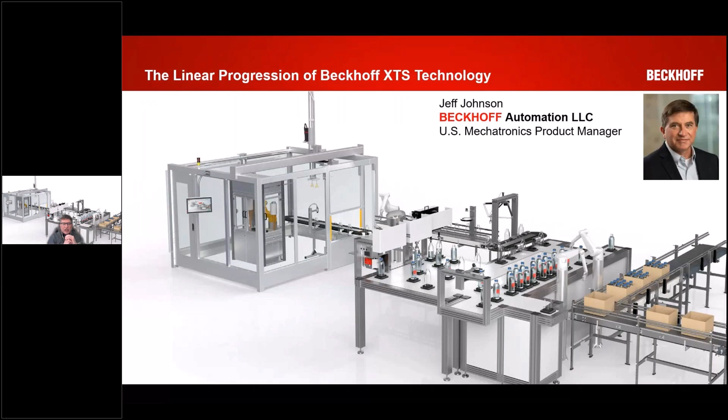The XTS, or Extended Transport System, will give you a lot of benefits and advantages in innovating your machine designs and processes as it has evolved over the years. This timeline shows the progression of the Beckhoff XTS technology. Back in the early 2000s, we developed a concept for a linear transport system working with one of our customers, Bosch Packaging, which is now called Syntegon. And we showed it in 2008 at the SPS show in Germany.

Think of that initial version as more of a concept design. Could this concept work? Is it feasible for the industry? Well, the concept was well received at the show and generated a lot of excitement. So we went back, took everything that we learned from that, and in 2012 we released what is now the production version called XTS. In 2014 we partnered with HEPCO for a more robust rail system. We also released the 45 and 22.5 degree curves.

Then in 2018, we released track management. In 2019, we expanded our magnet set for lighter and heavier payloads and faster machines. 2023 brought about the Hygienic XTS system. Last year, we released No Cable Technology, or NCT, which allows you to put actuators and sensors out on the movers with wireless power and data. HEPCO also expanded the line with the GFXR and strong movers for heavier payloads. This year, we're going to see 45 and 22.5 degree hygienic motor modules, along with a 10-pole magnet for the system. And HEPCO will be releasing a full aseptic stainless solution.

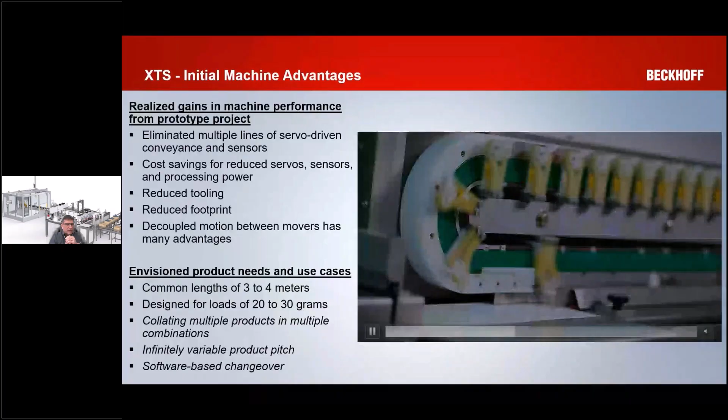From a use case, we first thought we'd see common lengths of 3 to 4 meters. In reality, our largest system is over 160 meters long today. Light payloads of 20 to 30 grams for high-speed packaging were the initial focus, but now we can go all the way up to 40 kilograms with some of the new heavy-duty movers. With independent motion, we also have the ability to collate multiple products together. The infinitely variable product pitch is another key factor, along with software changeovers. So, like I said, in 2012 we released XTS, and we're off and running.

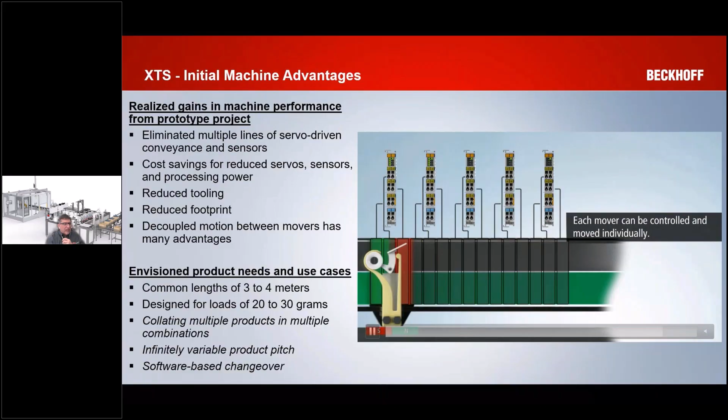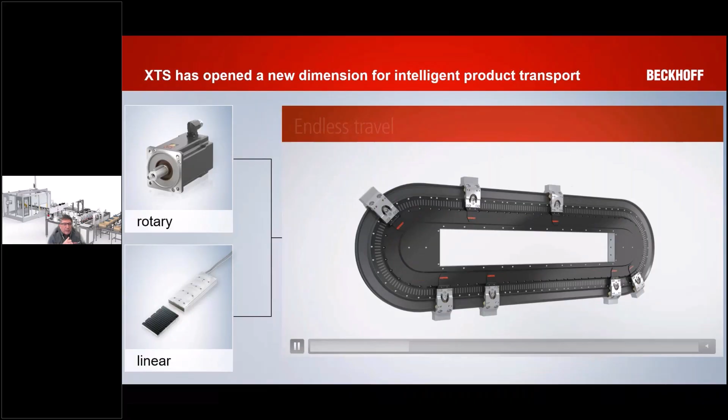So just a quick overview of what XTS is. With XTS, we combine the benefits of linear and rotary. We sort of flip-flopped it. The motor modules contain the power, electronics, feedback, everything. And the magnets, instead of being permanently mounted to the machine, are on our passive movers. So the movers can move freely around the track. They can move independently, or you can move them in groups. We can gear them, we can cam them. We can take 2 movers together to clamp products. So it gives you a lot of flexibility in your motion.

It's not a standard system where you index, do your work, index, do your work. You can have constant motion going around the system. Each mover can accelerate, start, and stop at a position. Like I said, we can gear them, we can cam them. So any of the typical motion that you're doing with a standard rotary motor, you can do with XTS. You get the rotary because we have the closed loop track. It just continuously goes around.

Like I said, one of the big benefits is the decoupled motion. So on these 2 videos here, what you can see is it's the same machine, but it's creating either stacks of cookies or sleeves of cookies. So on the fly changeover, you can switch from creating stacks to sleeves. You could change the sleeve length.

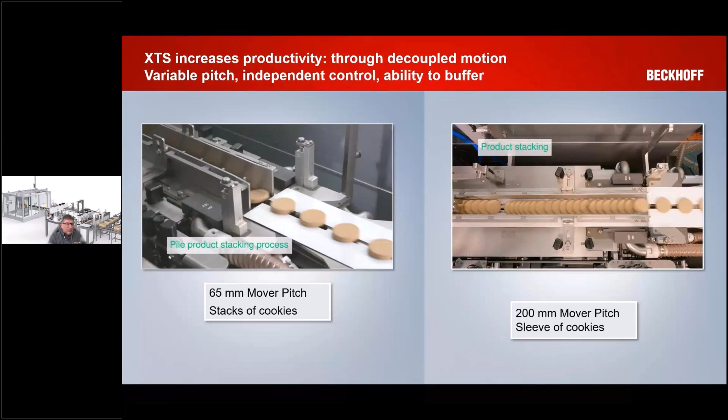So instead of putting 10 cookies in a sleeve, Halloween's coming up, but they want to do little snack packs, you could also do 2 cookies. So the nice thing here is no large mechanical changeovers. By just a touch of a button on your HMI, you can switch from stack mode to sleeve mode.

It's a very modular system. So when you look at it, it's really 5 components. So we have our industrial PC running our TwinCAT software. With TwinCAT, we do all of our configuration, programming, and everything. We have our industrial network, which is called EtherCAT, which connects to the motor modules.

Then the motor modules connect together to create the track shape. And then you have a guide rail and a mover. So it's a very clean system mechanically. It's very clean from a component standpoint.

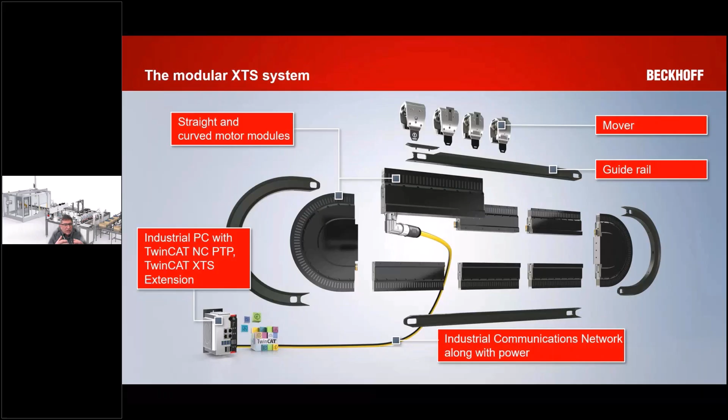We have lots of different types of motor modules. We have different lengths of straights, 250, 500, 1000 millimeter lengths. And then we have 45-degree curves, plus and minus 22.5-degree curves, and our nice little clothoid, which gives us a really small footprint. So that enables all these different track layouts.

So think of just a standard oval, you see a lot of them, but we can do L shapes, we can do Z shapes, pretty much any layout here that we can configure, even rings. So you can start replacing standard rotary indexers with it.

Another key benefit is it can shorten your time to market with innovative concepts. So an example here, this is a good one with the decoupled motion. You take a standard machine where we've got 5 stations. We're going to index every 4.5 seconds, so we get 1 part every 4.5 seconds. Our slowest process is 4 seconds, so that's 1 part every 4.5 seconds, or 800 per hour.

Now with XTS, you take the same concept. We can do a 4-up on the slow process. We can create queues before and after of 4 movers. Also, the first station is 1 second, so we can make that a 2-up station. So now by doing this, we've made the machine a little bit longer, but we've gone from 1 part every 4.5 seconds to 4 parts, up to 3,200 parts per hour.

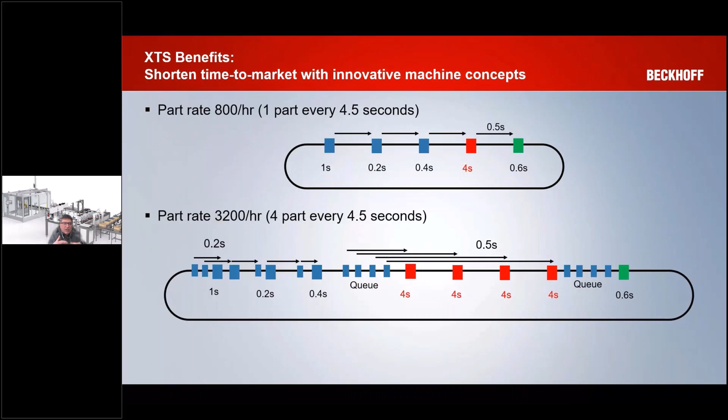So this is where you can get really innovative with your concepts. Now you can do a lot of things that you couldn't do with the standard fixed pitch indexing type system. From a performance standpoint, up to 4 meters per second, or 157 inches per second. We can do up to 10G acceleration. Payloads of up to 44 pounds or 20 kilograms per mover.

10 micrometer repeatability, which is about 4/10,000ths of an inch. Down to 50 millimeter or 2-inch center-to-center spacing. And then another key feature is we have mover 1 identification. So the system, from a positioning standpoint, is absolute all the way around the track. So there's a 0 position. And then on power up, we can detect our mover 1 and then assign the movers from there. That way, on power up, you know exactly where every single mover is on the system.

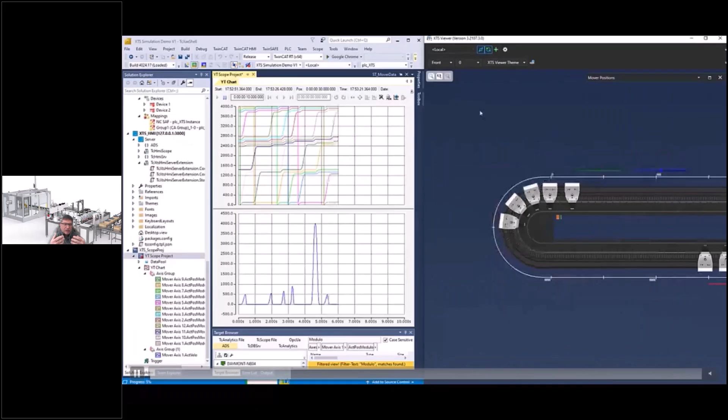One question we get asked is, how hard is the system to configure? So we've got a little short video here showing our simulation builder, so you can actually build the track ahead of time. You can build up your system. You can add your stations, add your movers. And then as you're running, we've got pre-programmed software. So on our GitHub, you can download sample code. So you can actually create and simulate this on your laptop for your whole system.

If you want to add an HMI using our HMI package, you just point at the XTS configuration. It actually draws the shape of the track. In this case, it's an oval, but if it was one of the more complex L shapes, it would draw that for you. You can add diagnostic stuff into your HMI. You could add your movers so you can fully animate everything. So this is showing a simulation of a large L-shaped track, so you can look for bottlenecks in the system.

So with all this great technology, can this deliver innovation to your machine? So what to look for? Some of our typical industries, we're pretty much in any industry, but a lot of the key ones are packaging, assembly, intralogistics, food and beverage, lab automation, and pharma.

When you look at it from a mechanical standpoint, what mechanics can be replaced with a linear transport system like this would be flight pins, star wheels, in-feed augers, belt-to-belt transfers for product spacing, buffering systems so we can provide more of a smooth product flow, sequential steps, complicated sequential steps. You see a lot of that in the assembly industry, assembly lines, and even high-speed diverting.

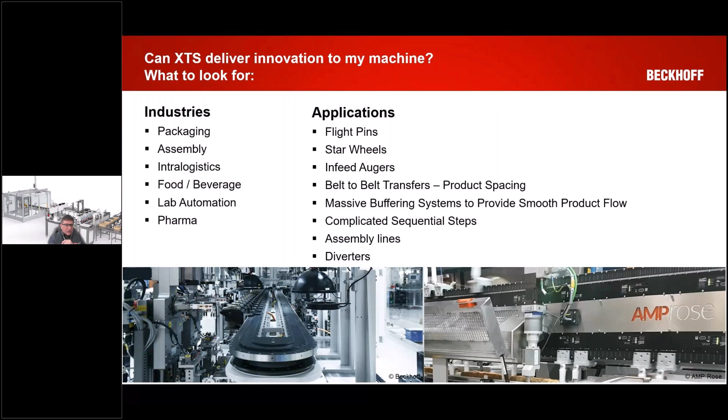So we've got a short little video here showing some of the different machine functions. So we can do like bottle filling, you can have multiple up stations. A pharma application here, so we're actually doing filling, capping on it. And you can see there's a lot of varying stations. So there's 1 up stations, 2 up stations.

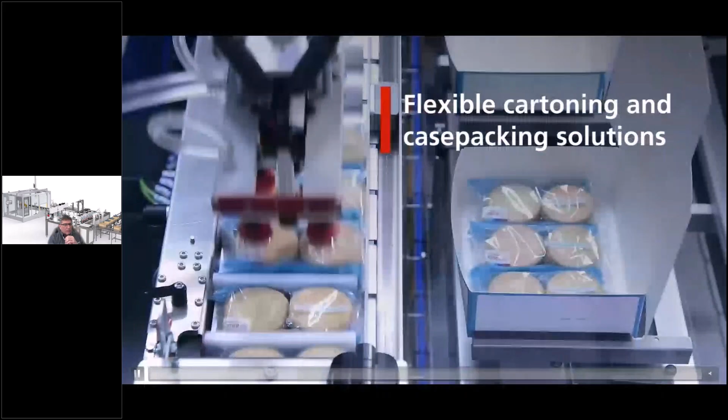Case packing and cartoning is another big use for it. The nice thing is it gives you the flexibility. So as the size of the carton grows, the movers just move closer or farther apart to do it. In this example there, we were actually forming the cartons, filling the cartons, and forming the carton at the end. In pharma and med tech, we can do lots of handling, especially with the hygienic systems.

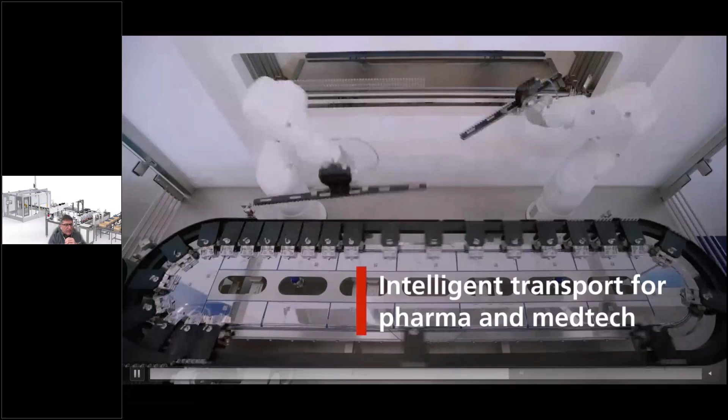This video here is transferring vials into like a freezer, and that machine actually ran backwards. When they empty it, they actually run it in reverse. Food packaging, again, feeding a lot of products to like flow wrappers. You can create mechanical cams to rotate product on the fly. This little video is showing how you can use 2 movers to clamp a product.

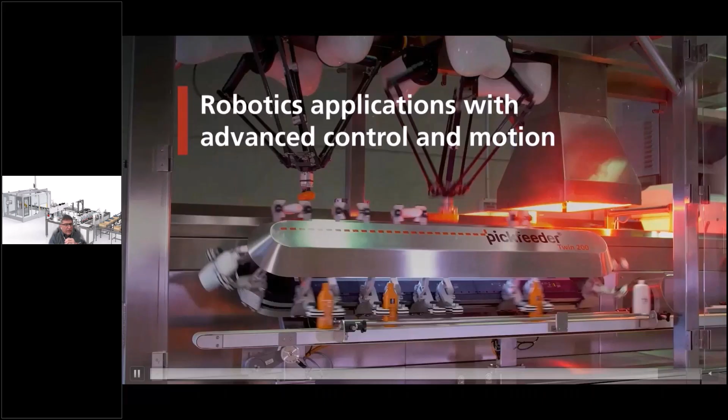But then in 2014, we partnered with HEPCO because we were seeing applications that wanted even heavier payloads. So with the HEPCO, we're utilizing their V-guided rail system, which mounts parallel to the track. And then the movers, there's 3 roller movers for the 180-degree curves. And then when you get to the 45 and 22.5, then we have 4 roller movers for even heavier payloads.

We expanded our magnet set. So the original magnet was the 5-pole, which gave you 100 newtons of peak and 30 newtons of continuous force. And then we expanded it 4, 7, and 10. With the 10, we get all the way up to 210 newtons per mover and a continuous force of 75 newtons. You can also use multiple movers together to carry heavier payloads.

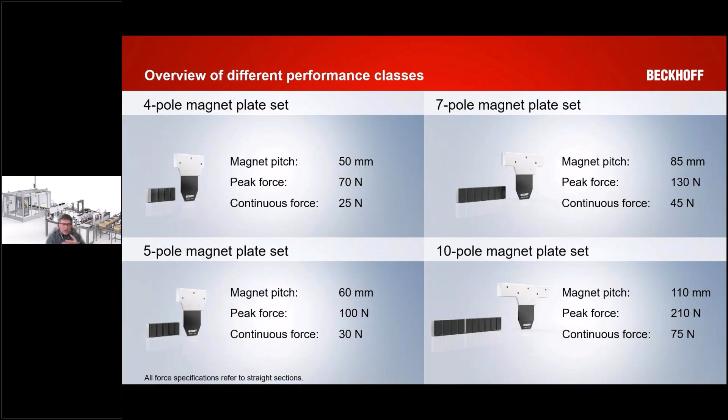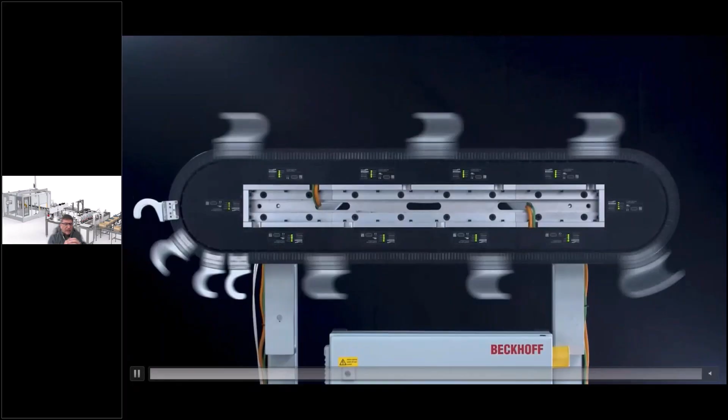So what are some of the advantages of having this range of magnets? We can take a look at a few applications. This is our agile mover. So the agile mover, we took as much weight out of the mover as we can, so very light payloads up to about half a pound payload, but very high speed. So the mover in this video is actually stopping in the lower left-hand corner there, and we're accelerating up to 4 meters per second in less than the width of the mover. So you can start thinking of 800, 1,200 parts per minute with this type of a mover.

For heavier payloads, then we have what we call the high drive mover. So it's a heavier 4-bearing mover with 40-millimeter bearings. And then you can also do a gantry style system for the high drive plus, where we gang 2 movers together for even a larger payload. So you can have a very heavy cantilevered payload in this type of an example here.

For the assembly industry, one of the asks has been for press forces. So a standard HEPCO mover can do about 100 newton press force, but we have a lot of customers that wanted to do heavier press forces. So up until today, they would then support that load mechanically to do the press force. What we're showing here is a test with our new GFX strong mover. So you can see in the design, it's a very strong I-beam, and the press force is designed so that the bearings support it.

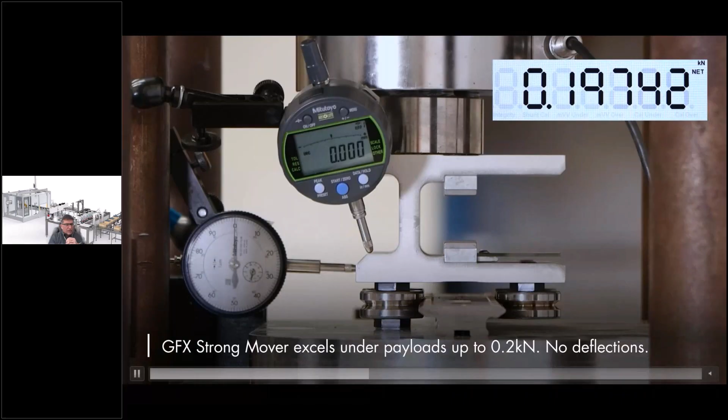So with this, till you get to about 200 newtons of press force, there's no deflection of the mover, and the test continues all the way up to about 2,800 newtons or 2.8 kilonewtons of force. So as we get above that 200 newtons, we can see a few microns of deflection of the mover, but it's linear, so it's actually predictable. So now with this mover here, it's going to allow you to do even heavier press forces and simplify your tooling. You won't have to mechanically support the tooling for a heavy press force.

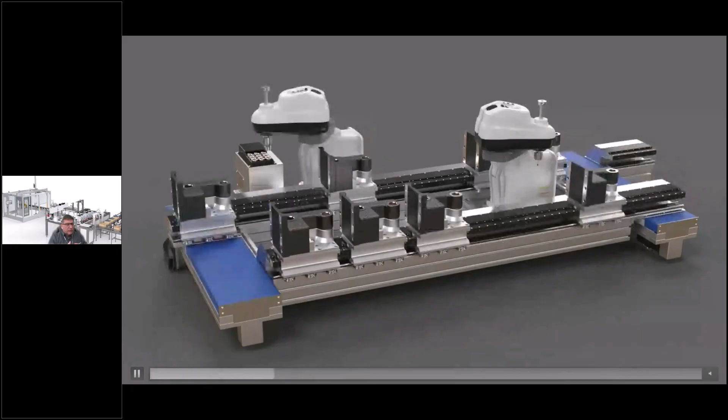Another innovation was GFX-R. So here you can see this mover here, it's got actually 6 bearings. So the GFX-R is for heavier payloads, all the way up to like 40 kilograms per mover. Now we could go to the 6-bearing mover, but with the 6 bearings you can't get it around a curve. So then we're utilizing our track management to shift the movers from one track to the other.

And besides using track management with this GFX-R here, we've got a lot of different examples. So let's go take a look at some of the other uses. So in this animation here, we're showing how we can now shift movers from one track to the other. Advantages here, now you can have parallel processes. You could stack processes on the machine so that you could go to subloops to make your footprint smaller. So instead of having a big long linear system, you could have multiple levels of processes.

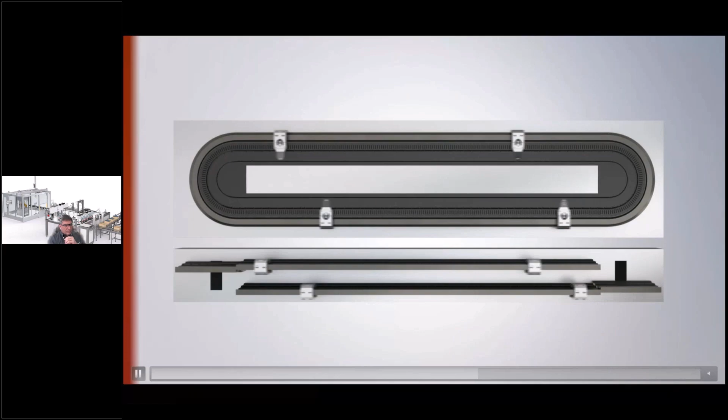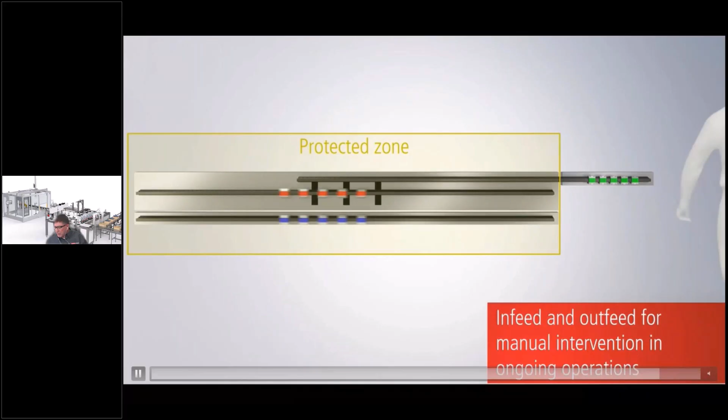While the 180-degree curve is a very small footprint, you could use track management to make an even smaller loop if needed. If you want to introduce more parts into a system, in this case here, we're bringing a different set of tooling in and then shifting the old set of tooling out. You can also shift tooling out into a manual rework station or a manual inspection station.

Here's an example of one of our customers' machines. So in this case here, they've got the larger oval at the bottom, and then there are different stations for inputting and outputting, workstation control for their process. But they use track management to shift movers up higher. It's a manual rework station, so it's not a complete loop. It's sort of an open-ended loop with the switches.

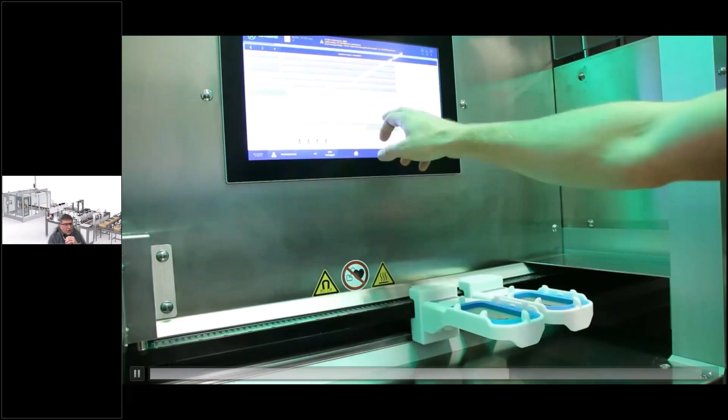With that, we've got just a little video showing it. So here from the bottom track, we can transfer movers up to the manual station up on top. Then they'll come around, they'll go into the manual station for the operator, so the operator can come in and inspect things, maybe manually rework whatever they need to do. And then they can send the movers back off to rejoin the product stream. Then here you can see the movers coming back down to get back into the flow of the product.

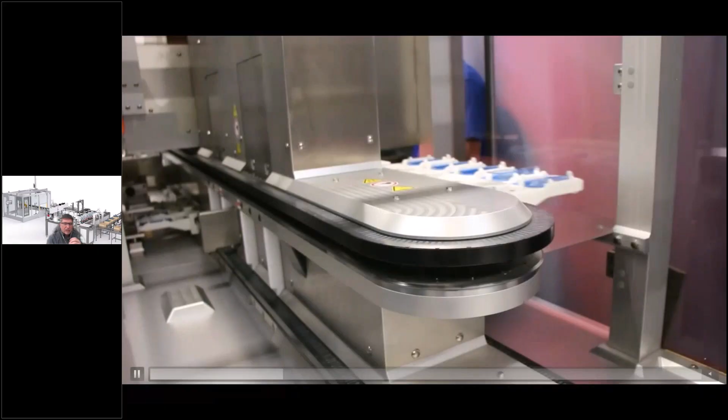So for more demanding applications, especially in food and beverage and pharmaceutical, we released a Hygienic version in 2023. So this video here is actually showing our tests. We went through several iterations of beta testing with customers. We tried things, went back to the drawing board, and it took several iterations to get the full IP69 certification. This video here is showing our testing at a third-party lab.

Excuse me for a second.

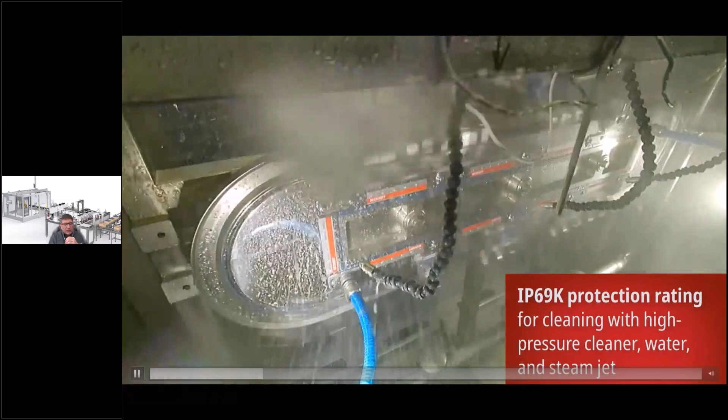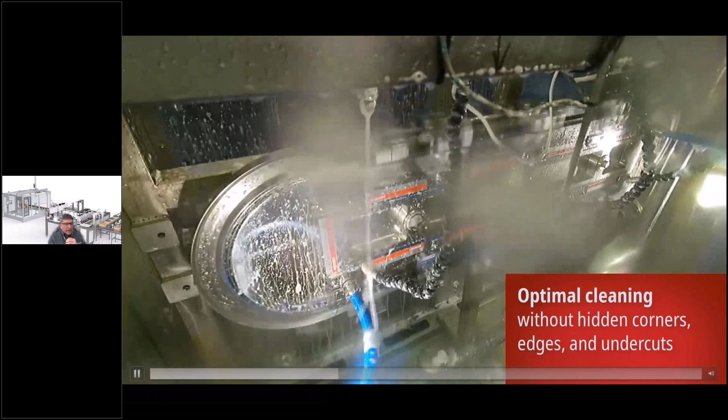So in the testing here, in a 3-month period, we did accelerated cleaning cycles to simulate a year of cleaning cycles. Things that we tested for were 3% alkaline solution, 35% hydrogen peroxide, 2% calcium chloride. So we did the full IP69K, so we'll be able to meet all the demands you would have from food and beverage and pharmaceutical type applications.

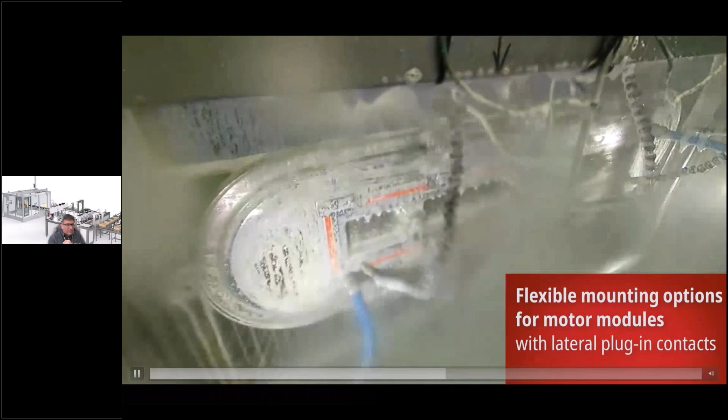The modules, it's the same modular construction with straight motor modules and curves. The initial release was with the 180-degree motor module, as you're seeing in the video here, but we're also this year releasing the 45 and 22.5-degree curves, and then a full aseptic solution for the system. It's a short little video clip of a customer's machine using the Hygienic system to feed product to a flow wrapper.

So at this point, I'd like to welcome our guest speaker, Tom Brooker from Bartell. I'll let him do a deeper introduction of himself. So appreciate it, Jeff. Appreciate the introduction, and appreciate the opportunity to talk to everyone this afternoon regarding Bartell, the company that I work with, as well as our partnership with Beckhoff as we integrate the XTS linear mover technology into our packaging equipment.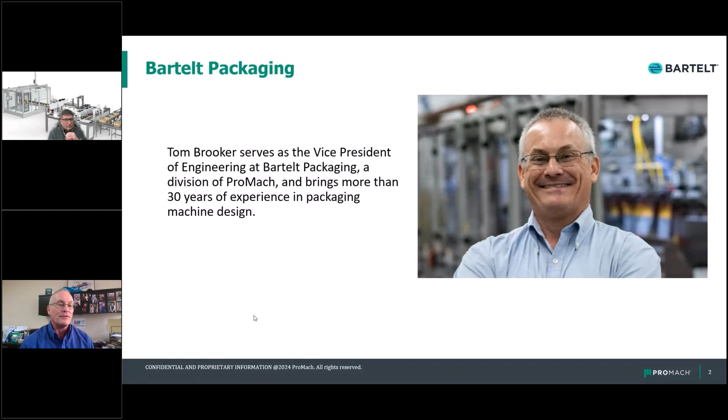Here at Bartelt, let me get this started here. I forgot to mention, but I'm the Vice President of Engineering here at Bartelt. We're in Sarasota, Florida. We are a division of ProMach, and we do packaging machinery, specifically pouching equipment and cartoning equipment, primarily for food and non-food. We've been doing it for a number of years. Over the last 15 years, we've actually fielded production machinery utilizing magnetic mover technology, such as we're talking about today with the XTS track. And as many of you know, the packaging environment, so we're in food packaging, is a very demanding environment.

It's not necessarily clean. It can be dirty, it can be hot, it can be messy, and we know that puts a lot of demand on the machinery and specifically the XTS technology. So prior to utilizing the Beckhoff product, we wanted to make sure that we had it fully vetted.

So what we did is talk to Beckhoff about it. Beckhoff was very accommodating. They said, "Hey, we understand that you want to see it before you buy it. So let's give you a track. Try it out in your R&D lab. You try it out for a while. Let us know what you think." So we received the track.

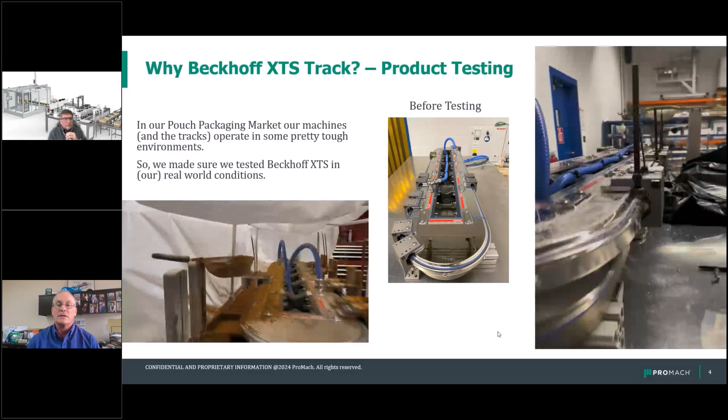So we had the system. This is video from one of the tests, and I got video of a second test we did with the same system. But effectively for 2 months straight, this track ran nonstop, and we introduced various types of products that might be used in a packaging environment. Various fillers and sugars and salts and all kind of different products that can make a mess of packaging machinery.

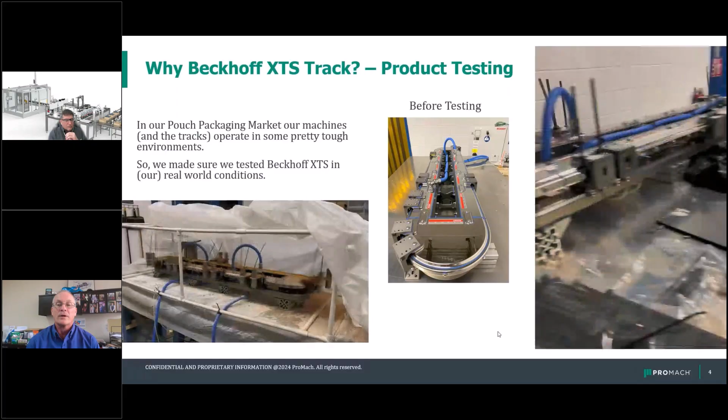During this testing, it was really important to us that Beckhoff was extremely receptive and very supportive of our testing efforts. And in fact, we found a few things from our experiences that we suggested Beckhoff maybe look at in the future. And much to our happiness, they actually took some of those concepts and integrated them into the design, such that from our perspective, the product that we now purchase from them is more suited to the packaging environment that we operate in daily. And that was a great testament to the support and the partnership that Beckhoff provides.

At the end of the 2 months of testing, we were 100% convinced that the Beckhoff track would survive in our environments, and we look forward to utilizing it. Getting back to the XTS track in general, the reason we use the XTS track in our machinery can really be boiled down to extreme flexibility.

Our equipment is utilized in demanding applications. We may have customers that on the same machine want to run product that is at a convenience store or a retail outlet such as a Walmart or something, and then maybe at a club store as well. And they'd like to run all of that product through a single machine line as opposed to having multiple machine lines to support that product utilization. The XTS track provides the extreme flexibility to be able to accommodate those requests.

Part and parcel of that, and Jeff touched on it earlier, in the same footprint, the same machine, we can run it as intermittent motion. We can run it as continuous motion. We can do both in one machine. So, for instance, if we're filling a liquid product, we may choose to index at portions of the machine where it makes sense to stop and start and maybe help us with the seals or something like that. When it comes to filling, if it's a low viscosity fluid, we may choose to run continuous during the fill process, such that we don't slosh the product out of the package. The XTS provides that flexibility for us to do that.

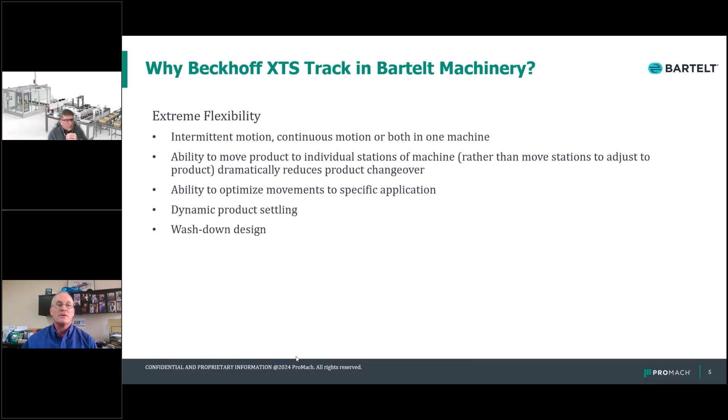Wash down design, again, in our food environment that we deal with all the time. Really, most customers now are starting to lean towards a wash down design to give them a good opportunity to ensure that they take care of any allergens or any cleanup that needs to be done to ensure their product is safe.

And then, as Jeff noted earlier, the pitchless design, the ability to have pitchless designs allows us to configure the machinery to suit our application. So again, we don't necessarily have a one-size-fits-all machine. We now have a machine that can be configured to suit the application. And we basically leverage that into what we call a suite of flexible solutions.

So, for instance, a MAG L, we configure the machine in a linear fashion. So this would be perfect for an application where the process flow is 100% inline. You bring in raw material into one side of your building, you package it in the middle, and you discharge completed pallets of product on the far side of the building. So a nice linear flow. The MAG L is the perfect solution for that.

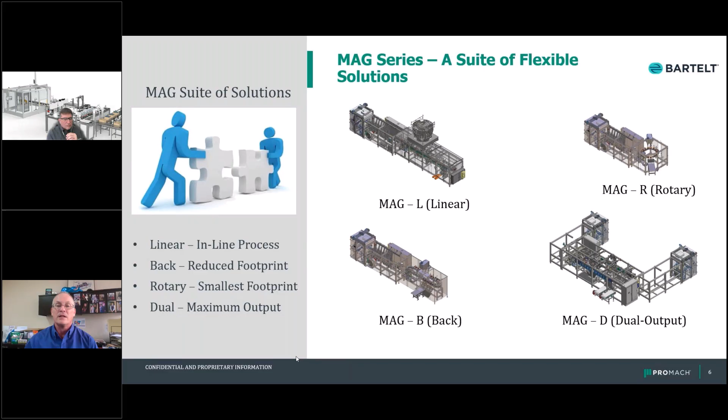So we can use the MAG R for instances where space is at an absolute premium, and the customer has to have the smallest solution available for the output that's required.

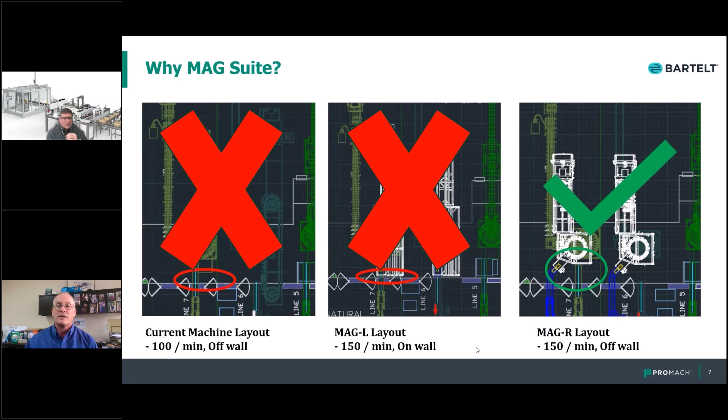So this runs 150 a minute instead of 100 a minute. It's obviously a new solution as opposed to the 25-year-old solution that they were previously employing. And it was just a win-win. This was an example of how we utilize the flexibility of the XTS track to get the customer into the right solution, as opposed to trying to put the square peg in the round hole.

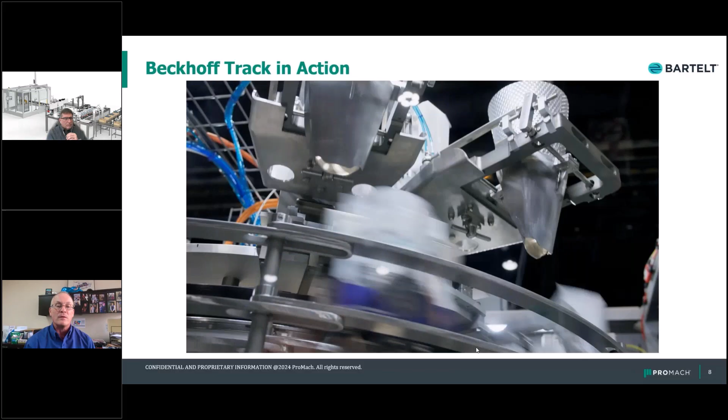So really, all of the road that we've traveled here with Beckhoff came to fruition at the 2024 Pack Expo in Chicago, where we debuted this rotary machine that we have. So this machine, as you can see, it's a full circular ring. It's about a 1.3 meter diameter ring.

We're utilizing these movers. This happens to be a pouch machine, so the way we utilize it is one carrier of the pouch is on one bag clamp and another carrier is attached to a second bag clamp. So with the two bag clamps, we're actually holding the pouch and moving it through the machine. You could see previously that we were shaking the pouch a little bit at the fill.

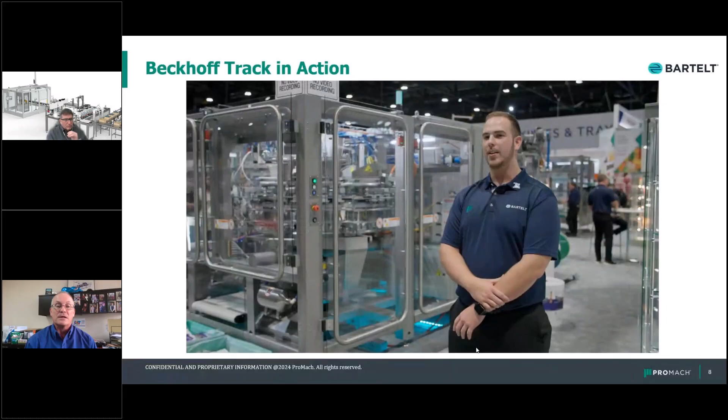So this all came to be from the extensive testing that we did with Beckhoff. We proved that this technology was going to work in packaging. We proved via the customer application that this round configuration was the right application for the customer, and they were able to move forward with a successful application.

And that's what I have for you today. Hopefully there'll be some questions at the end. Love to talk some more about what we've been able to provide.

I am muted. Sorry about that. So thanks again, Tom. What I was saying when I was muted was, from a Beckhoff side, we've enjoyed working with you and looking forward to working with you and your team on all these new designs. So it's been an exciting 2 or 3 years that we've been working together.

So the next feature we want to talk about will be, go in here. One of the big asks ever since we came out with XTS was customers always said it'd be really nice to have power and I/O out on the mover so that we can actually put actuators and sensors out there. So the next evolution was getting wireless power and data to the movers, which we released last year, and we call it NCT, which stands for No Cable Technology.

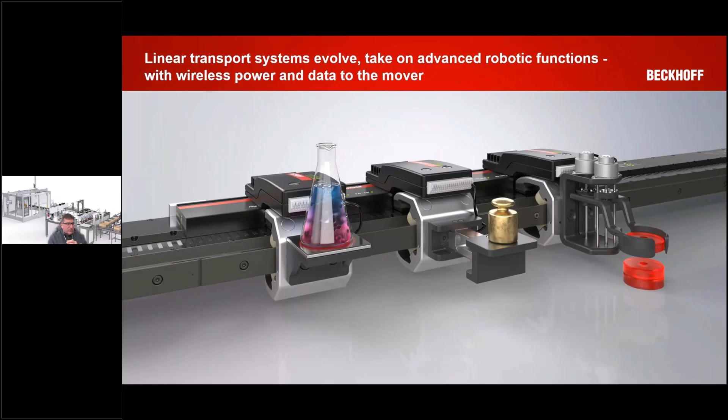So with NCT now, we can put all kinds of different sensors and basically any end-of-arm tooling out on the movers. In our initial release, there'll be digital inputs, digital outputs, analog inputs, and then some PWM outputs so you could drive a little DC motor with it. Or you can also use them for just standard I/O if you need to. Up to 35 watts continuous power and 75 watts peak.

So now you can start putting things on, like here we've got a little vacuum generator, so we can actually use 1 or 2 movers. In this case here, we're using 2 movers to pick a product.

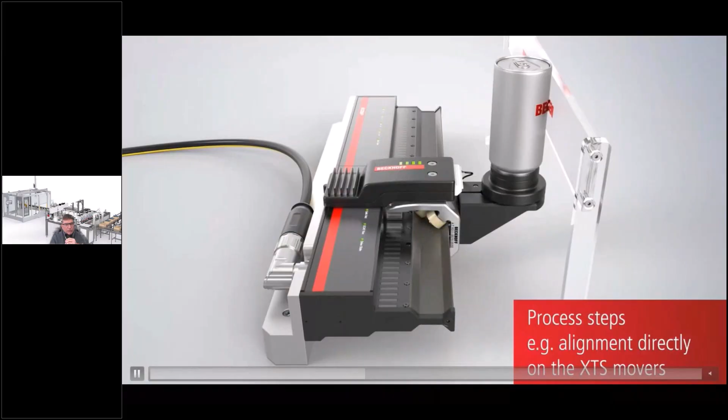So again, it's showing both the benefit of NCT and the ability that we can coordinate movers together. This is a little tease one here. So while you can put a DC motor out here, we are looking at adding at some point down the road servo and stepper motors, so you can actually do part alignment. But there's also other end of arm tooling out there that you can actually rotate and orient parts with. So with existing end of arm tooling, you could actually do that rotation orientation if you wanted.

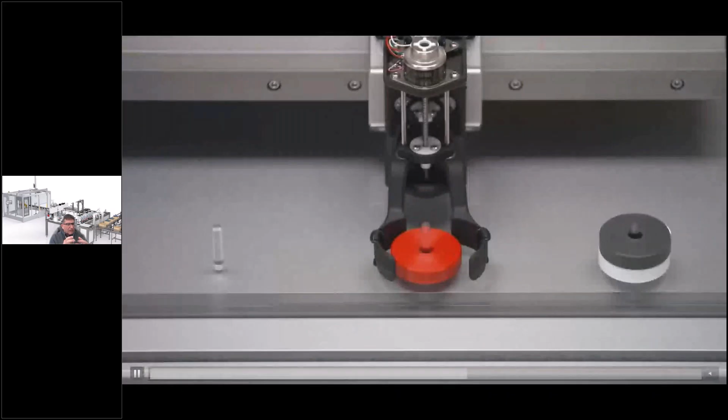Standard grippers in this demo here, a lot of our demos, we sort of made our own grippers. However, any end of arm tooling out there that you use for a robot, you can use with NCT that runs off 24 volts. Just another example here where maybe at some point in the process you want to transfer a part from one machine to the other. Again, NCT could be used to grip it.

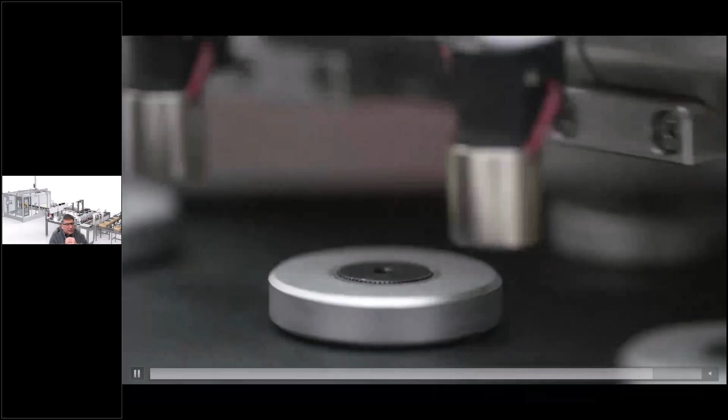The last little video here, it's showing the NCT actually working with our XPlanar, which will be an upcoming webinar. But in this case here, each mover is a little 2-axis pick-and-place robot. So we come around, we pick up the parts, go around to the other side of the track, and then we can place them on a mover in a specific pack-out formation. So as you look at the ability here that we can pick parts and actually combine it with the XPlanar, it just opens the door for a lot more innovative designs that you can do with the 2 systems.

So again, here's some of the different grippers that we've tested. We do have test systems in our advanced applications lab in Denver and in our main headquarters in Savage, Minnesota. And we've had a lot of customers already. We've been working with them where they'll send us tooling, we'll get it mounted up and get it running, and then they'll come up and spend a day or 2 in lab testing out, will the gripper work? Is there enough vacuum to hold my parts and everything? So as you come through these designs, we're there to work with you just like we have with Bartelt. Get some of your tooling and we can do some testing, and you can come and join us with the testing.

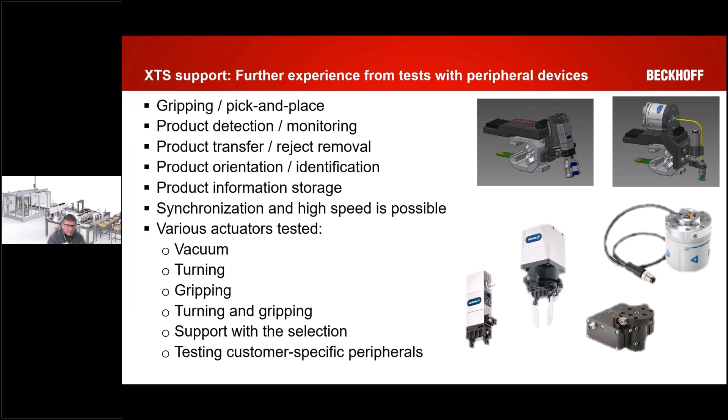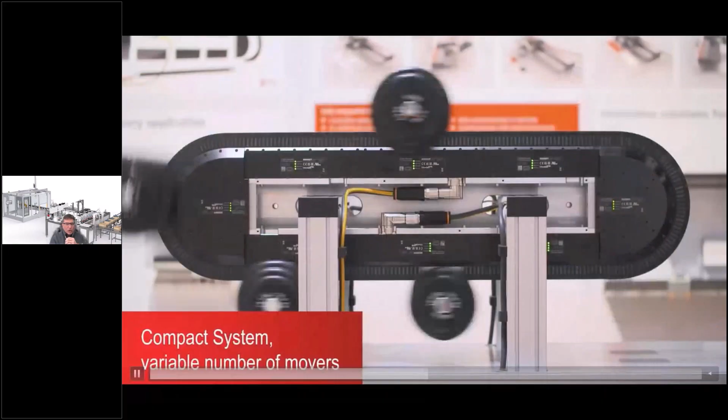While we have the ability to carry heavy payloads with the 45 degree curves and the strong mover and GFX, some customers have been saying, well, we would like to do this within the smaller footprint. So what we've done, we work with HEPCO for a Gantry style system. So here's this little show demo that we actually showed at Pack Expo, and with 1 mover we can carry up to about 11.5 pounds. With 2 movers on this system, we can do up to 34 pounds, supported by the Gantry. And then if you would do a Gantry with the 45 degree curves, then you could get up to even heavier payloads of 88 pounds, 100 pound type payloads.

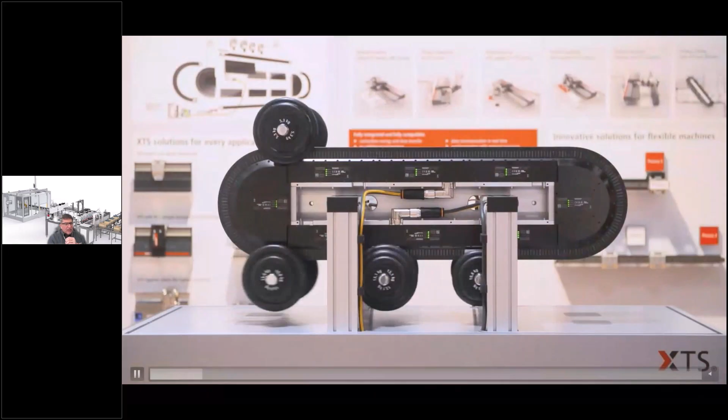When we showed this at the show, there were a couple comments from a couple customers. One was saying, well, it's running, and they were surprised at how, even though we're running different payloads here, they're all running at the same speed. And he also commented on how quiet the system was. With the V-guided rail system, it's a very quiet, smooth running system.

And his coworker commented, well, besides being quiet, are there any other benefits? Well, our answer was, when you hear mechanical noise, you hear clattering or lots of mechanical noise, that means there's vibration, there's mechanical wear. So the smoother the system, the quieter the system is, the longer your maintenance cycles are going to be. So that's another good benefit with the V-guided rail technology.

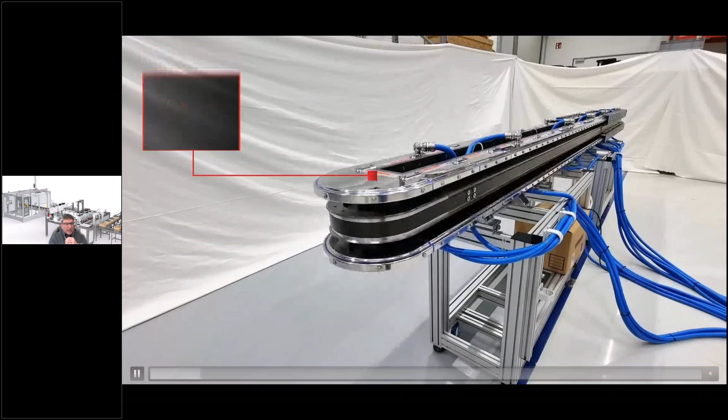You can also use this gantry style system like horizontal flat here. So this is actually a hygienic system, so we can do the gantry systems with both standard and hygienic. And in this case here, this was for a pharmaceutical application. And what they needed is a varying product pitch, but they wanted to get smaller than the 50 or 60 millimeter center distance.

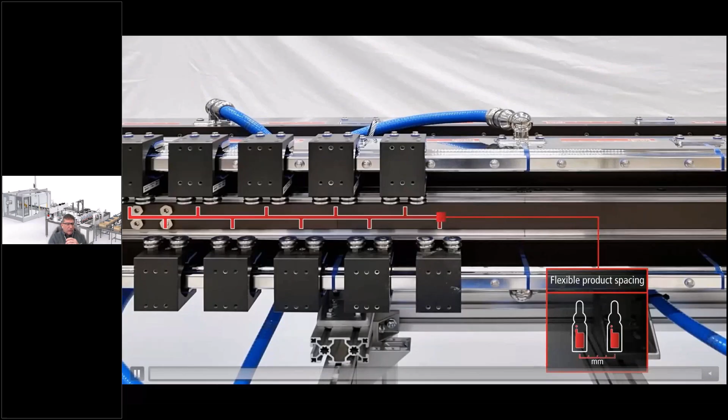So what this allows you to do is you can have tooling from the bottom track extend up between the movers on the top side. And now we can get down, in this case here, they got down to about a 30 millimeter center to center distance. But then again, on the same machine, they could also run larger products. So again, it gives you that flexibility of there's no mechanical changeover. It's just simply software changeover on how close we want the movers to go together.

So again, a lot of flexibility. And this style gantry, like I said, it can also be done with the standard IP65 modules. We even had one customer, they actually did a triple stack to get an even finer pitch system.

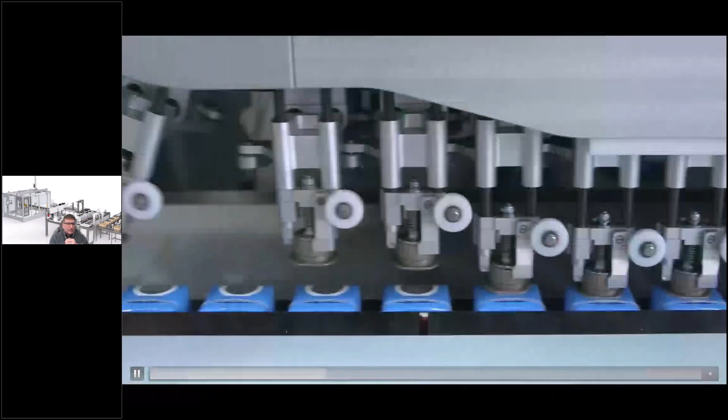Another advantage with the gantry style systems is you can have the two movers going together, and this is a Tetra Pak machine, it's a capping machine, and they actually have mechanical linkages between the movers on the two tracks. As you can see in the video, as it goes around, the movers are mechanically linked together to do capping type functions.

When they utilized XTS here, this actually tripled their current production rates. This machine here will run up to 25,000 packages per hour. It reduced the overall footprint of their existing machines at a lower cost. So again, a lot of benefits: smaller footprint, lower cost, and higher throughput.

And then we changed the feedback, so we made it a lower cost feedback. What that does is it's lowered the cost of it and retained most of the functionality of the standard motor module. We have to derate it a little bit. So on the 5-pole magnet with this feedback, the derating would be 30 newtons of continuous force versus 35, and then 80 newtons peak versus 100.

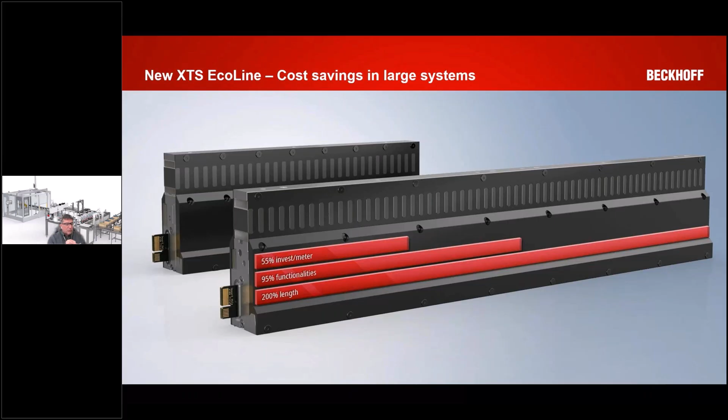But again, it could be used for return, so a lot of times you don't need that performance. Absolute accuracy is about 0.7 millimeters versus 0.1 with the reduced feedback. But we're not using this for doing the actual work, and there are applications where this type of absolute positioning will meet the application, so you could do the whole system with EcoLine modules.

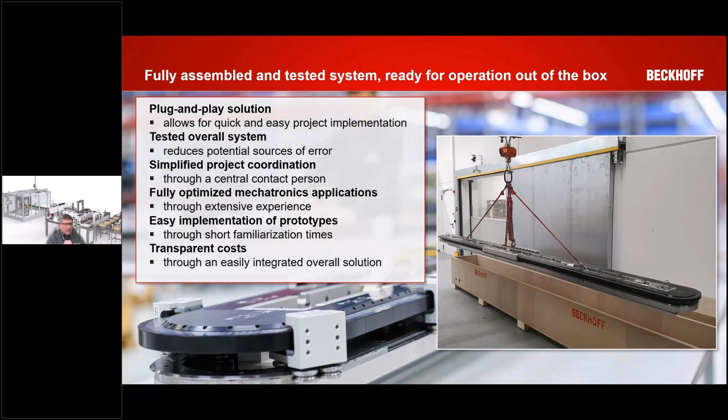If you want to assemble it yourself, we can sell you the individual components too. But there's a lot of benefits with a fully assembled system. It's a plug and play solution. It's fully tested. We do a lot of the design work and send you the drawings to sign off. So it's sort of a win-win for both of us.

Example here of our systems group. This was actually a large project we did for a customer where there's actually 3 XTS systems. So it's a couple oval systems and then a big L-shaped system.

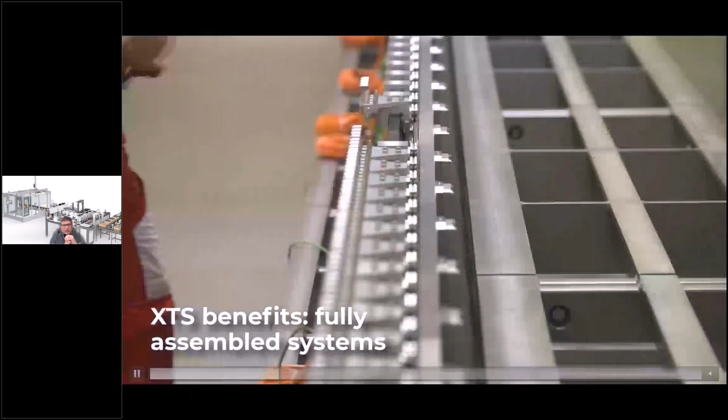So in our facility, this is Systems Group in Germany, in rural Germany, close to our headquarters. In this case, the customer actually sent us the tooling. We mounted the tooling, and you can actually do the first FAT at our facility if need be. This sort of shows you the magnitude of how large some of these systems get, and how they interact. So this is actually an assembly system for the medical industry.

So we've covered a lot of ground in a short amount of time. Got to recap just a few of the key benefits of XTS. Again, the one I keep going back to is the individually controlled movers. That is such a big feature. When you design around it, that's what gives you the reduced footprints, higher producing machines, and that.

Simple design, it's a compact design. We enable software changeovers, small footprints. Simulation is a big one. You can simulate the system to make sure: do we have enough space? Do we have enough movers? Those type of things. Fully assembled systems is a huge benefit.

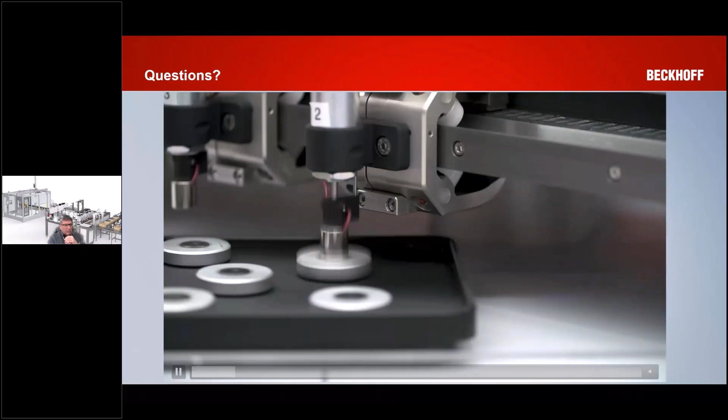This video here is just a little longer version of the XTS and the XPlanar working together.

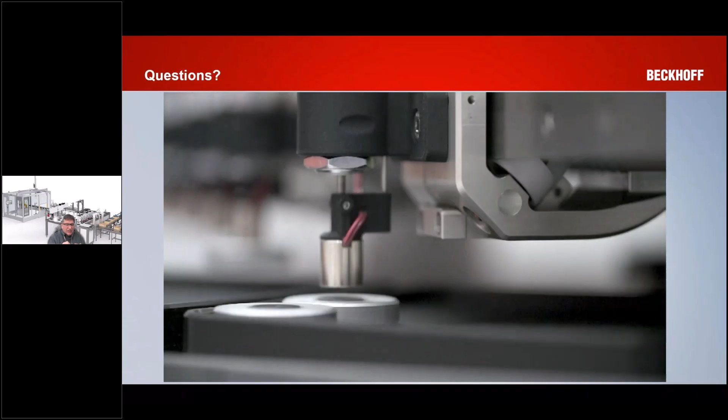Jeff, I've actually got a good one here. Oh, okay. The question was to Bartell. Can you elaborate on the learning curve for a customer that has no XTS experience? Does the customer have to hire engineers or other technical staff to support? And this is a great question. We get this fairly often in that there's still a lot of people that aren't 100% up to speed on XTS and linear mover technology.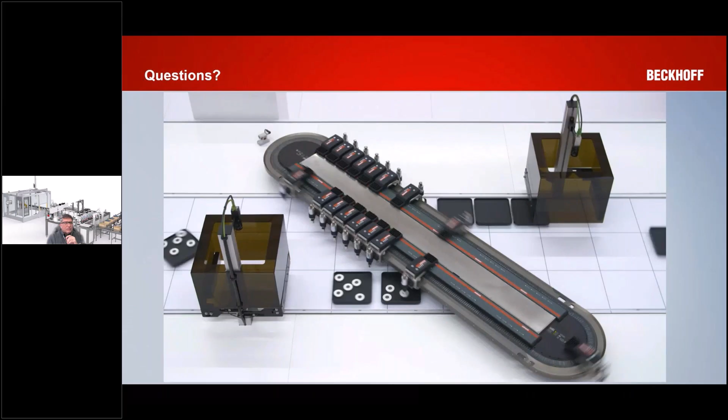Pleased to report that the learning curve is made very, very simple. Beckhoff specifically has great support here in North America. For instance, when we started working with them, the support was exemplary. When our customers started working with them, Beckhoff provides really good training opportunities for the customers.

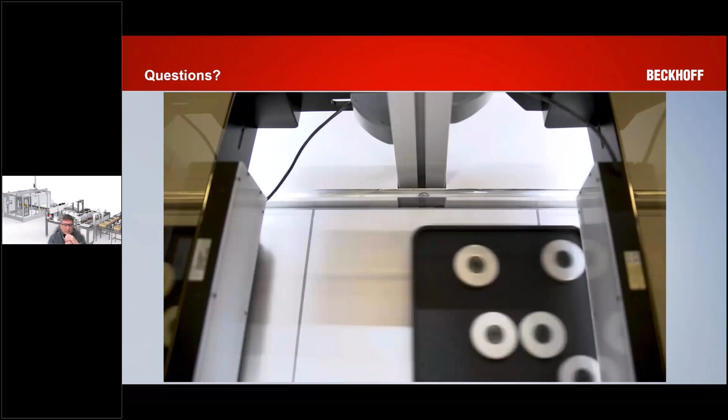And the reality is, the utilization, the customer interaction with the XTS equipment is seamless. It's all behind the scenes. I mean, all the crazy algorithms or whatnot that Beckhoff may have produced over the years are seamless. They're behind the scenes to the customer. The customer has a very intuitive, interactive screen to basically go in and say, I want to move this or that.

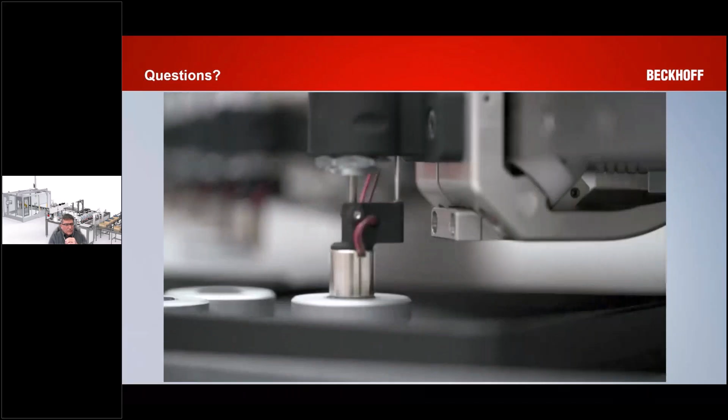The simulation software is very easy to use. I mean, it just happened to be what pops up here. Very easy to use. And basically with the simulation software, you can do whatever you need to. And then the maintenance of the track is quite simple. And again, the support staff here in North America, they're based out of the Minneapolis area, and they have a nice operation with a lot of good support.

So long answer to a relatively short question, but it's actually a lot easier than you think. When you watch the technology, it looks like it's rocket science. When you utilize it, you find that it's very user friendly. And to answer specifically the question, our customers are not having to hire additional engineers or support personnel. They're just training what they have and coming away with a good experience.

Thanks, Tom. That was a good answer.

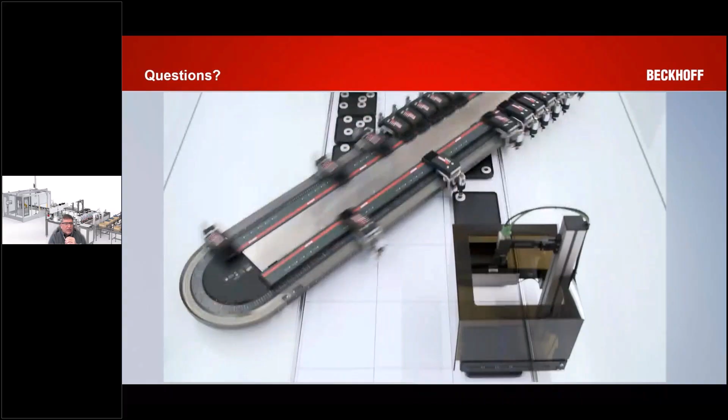I like that. Just to expound a little bit, like Tom said, we do a lot of simulations early on. So a lot of times if you've got a concept, we can put together, in a very short period of time, a simulation of your system. And because a lot of times it's a new concept, maybe you need to sell it internally, up the chain, or you need to sell it to your customer. And by showing the simulation running, this is how the machines will be running in production, and showing the difference, it really opens up a lot of eyes, and it helps you sell this technology.

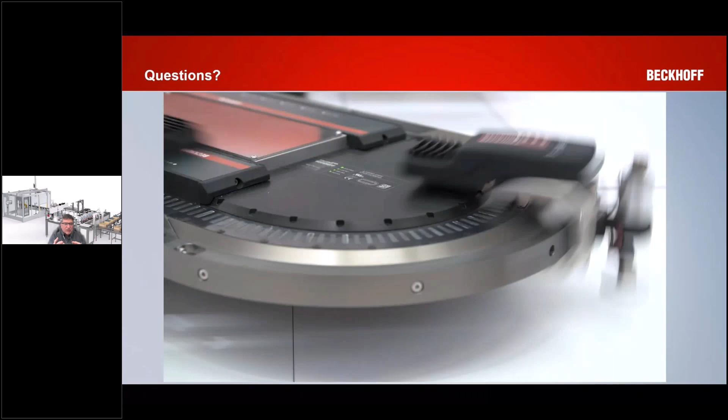I did have one question pop in. The question was, do NCT movers lose power on the curved sections? And the answer is yes. Right now, we have NCT for the straight modules. On the roadmap would be NCT modules for the 45-degree curves. We don't think we're going to be able to do it on the 180-degree curves with that tight radius. There's not a lot of pickup area, because you can see where the pickup is. It's on the smallest portion of the 180-degree curve. There's not a lot of surface area for getting both the wireless power and data up to it. But on the 45-degree curves, we feel that there will be.

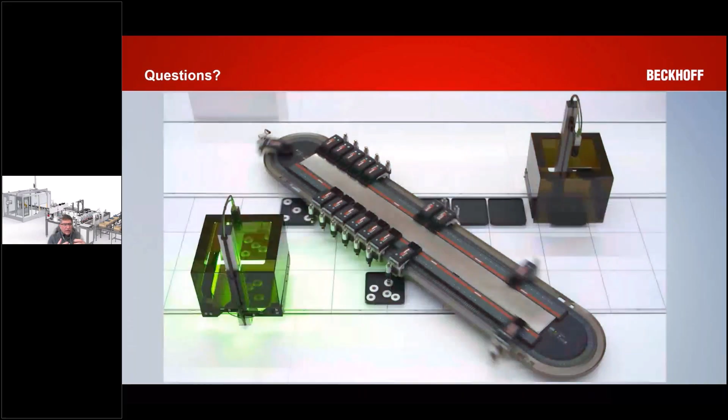But the other thing is, when you look at most end-of-arm tooling for robots, especially grippers and those type things, they remember the state. So if the gripper's closed when it loses power, it's going to stay closed. If the gripper is open, it's going to stay open, so you can hold product around the curve. And a lot of the vacuum generators have check valves. So as long as you don't sit in the curve forever and you've got a good seal, the check valve would allow you to carry the product, even holding it with a vacuum, around the curve to the next motor module with NCT, and then pick it back up. So there are things that you can do there. And like I said, we have systems to test. So if you have tooling, we can set it up in the lab and see if it'll work.

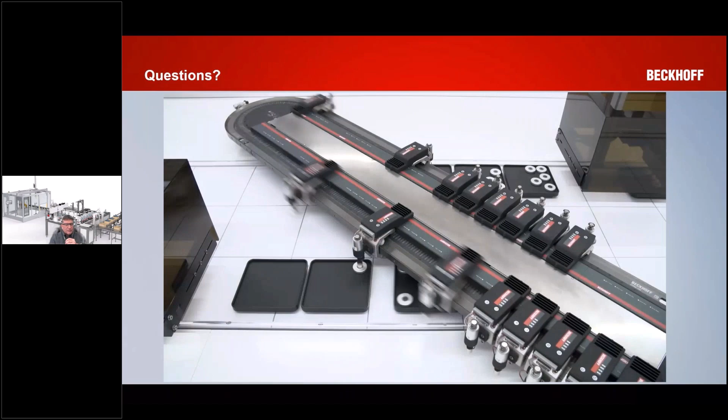Okay, let's see, any more. Oh, another question just popped in.

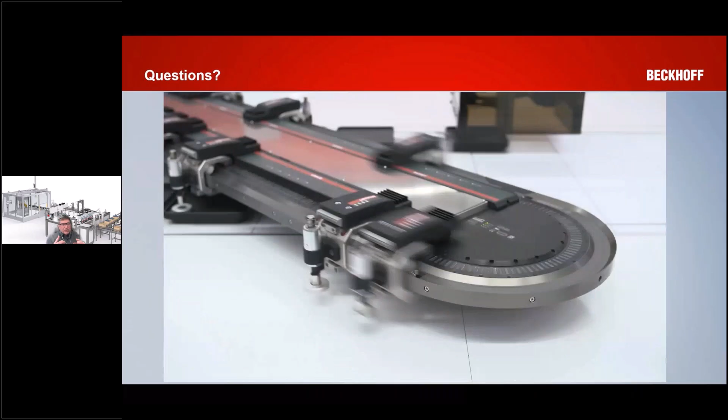The question is, is there integrated safety? Can safety zones be established? Currently, built-in STO, like you would have in a servo drive, is on the roadmap. We're currently working on it, and we should see some movement on that this coming year. Right now, what you can do is each infeed has its own power. So from a safety standpoint, when a mover moves into a section and the operator goes to open the guard, you would do like you do with a normal servo axis. You would stop it, disable the mover, and then we can drop the 48-volt power to that section.

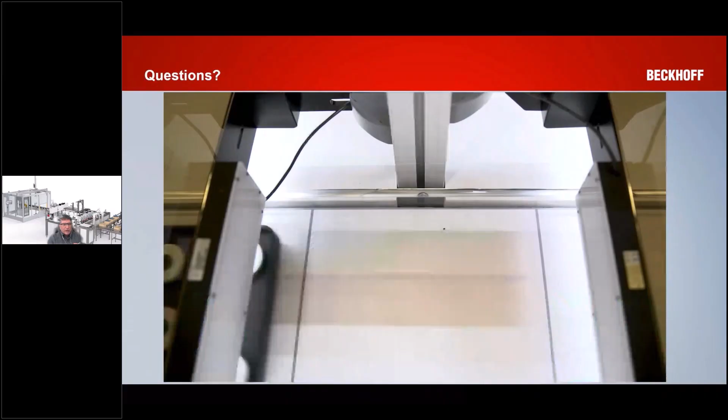So the movers in all the other sections are moving, but in just that little section of the machine where the operator is, the operator can go in, work, clear the jam, whatever they need to do, and then when they close the doors back up, you reapply power, re-enable the mover, and off you go. But like I said, we do have STO on the roadmap, so it would be a new motor module design where we would actually have the built-in safety function.

Every time I try saying there's no more questions, one pops in, so we'll wait for another minute here just to make sure nothing comes in.